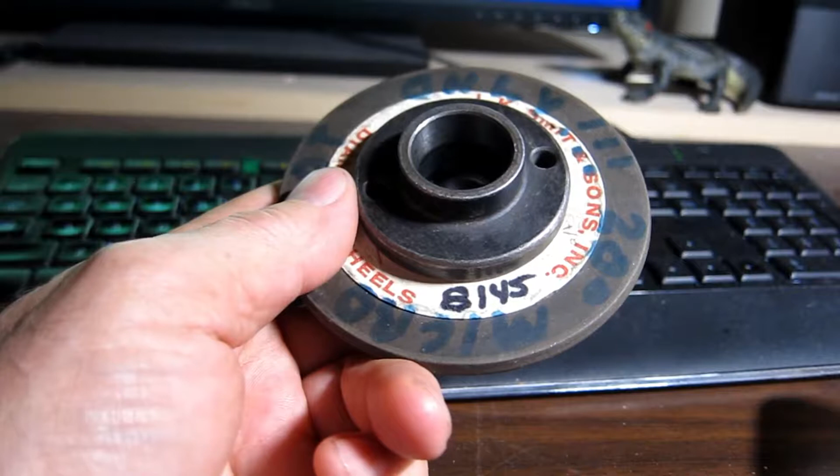Okay, this video is going to explain how to draw up placing balls in tapers to measure them when you're cutting them. It's going to be based heavily on 7.125 degrees per side, which is the grinding wheel hub taper. See that in there?

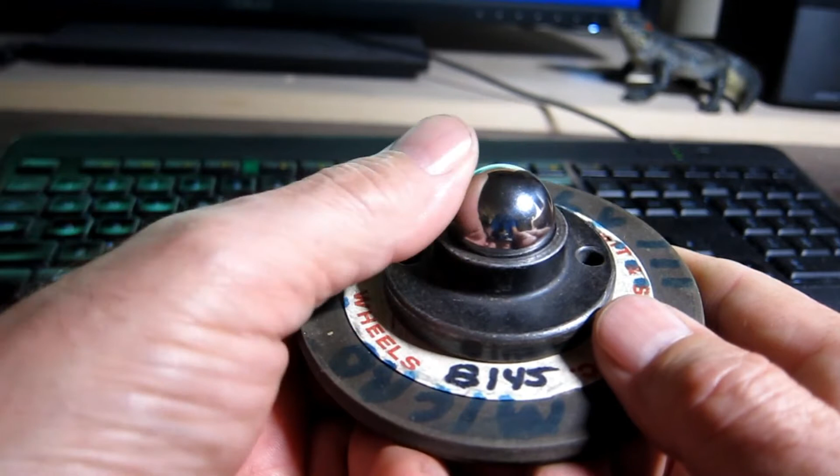Okay, now this is very common. It's for Herrig surface grinders, and it's 1 inch on the big end. That's how they're defined, by the size of the big end of the taper. And so it's 1 inch. Okay, so this is a 1 inch ball, and it goes like that. And it just so happens that tangency, it does hit just barely at the very top. And so I'll show you that. But this video is going to be based on that.

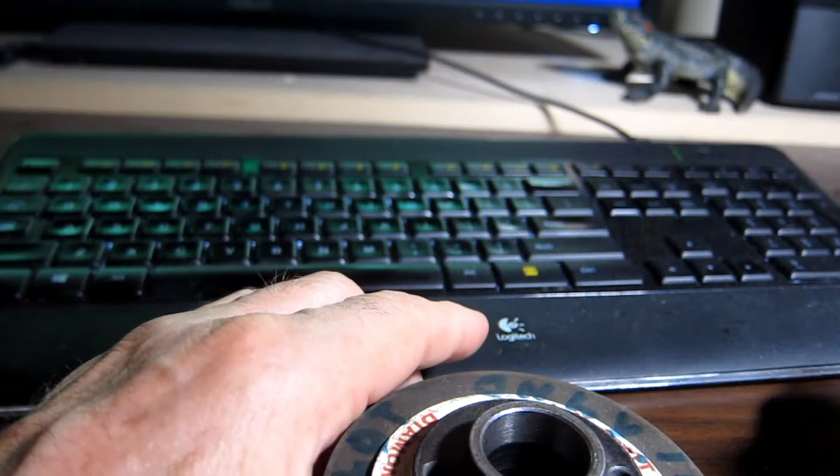It's not going to be based on teaching trigonometry from A to Z or teaching how to use CAD/CAM. Because if you have CAD/CAM, after you see how to do it, you will be able to go and do it. In the video, I can't teach every keystroke, every trigonometry angle, sine and cosine, and so forth. But anyway, there you go. So I have to stop filming, otherwise the camera won't focus on the screen.

I'll show two methods: how to place a sphere in a taper, in other words, the ball that you're going to use to check the taper while you're making it, and also how to do roll pins. How do you place the roll pin on the geometry so that then you can click and tell how to measure.

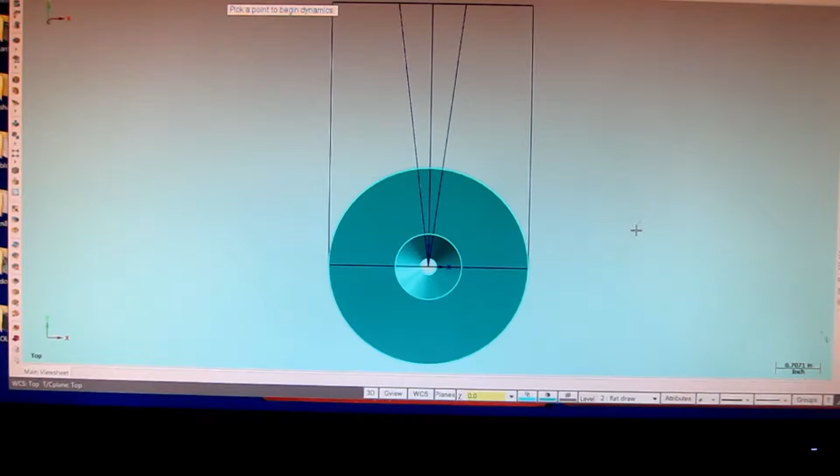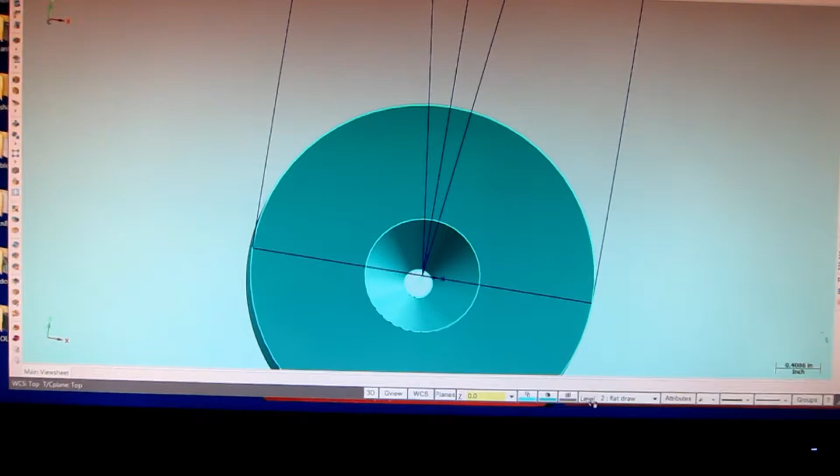Okay, so to put the sphere in a taper, here it is. See, there's the physical taper itself created in the solid, but we're not going to use that. I just wanted to show you that. See the taper? That's the 7.125 for a Harig surface grinder and most surface grinders in a shop. But we're not going to use that. What you do is you just draw it in 2D.

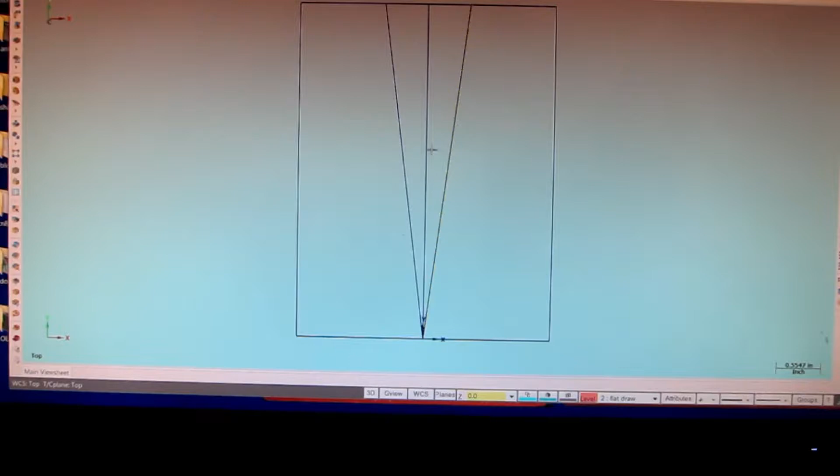Okay, like this. And here again, it assumes that, for instance, each click to produce these lines, produce a center line and then tell it to rotate it over 7.125 and then the other way 7.125 to produce this cone. It's not the scope of this video for me to explain everything like that, or it'd be hours long.

Okay, now how do you place a sphere down in there? Now the top of this is 1 inch. Up there, that's 1 inch. In other words, that hub you saw with the ball sitting on top of it, that's what this is. I did bring it down to a point, and that is the way that people do it with their drawings. You just bring the cone to a point.

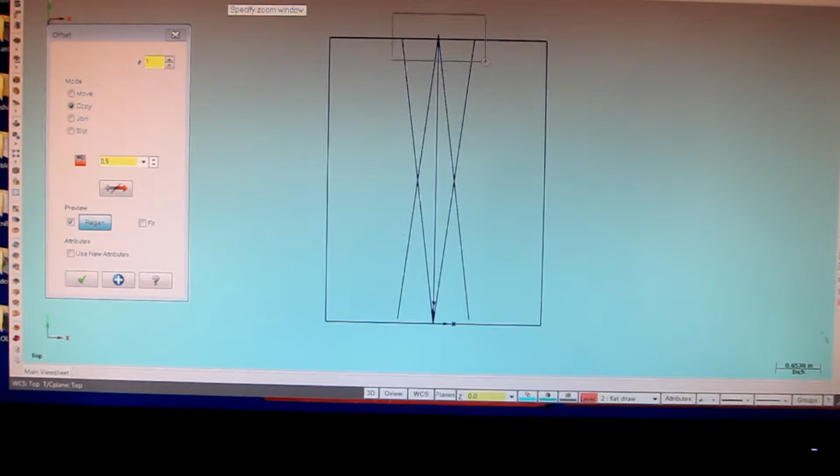Okay, so if you want to place a 1 inch ball in there, you just offset the lines by half an inch. So X-form, offset, 0.5. Okay, and you click on the lines, offset, offset. Now see where they coincide up there? Right there, right where they coincide. Okay, so I go circle, a diameter of 1 inch, and click right there at the intersection, and look at what we have there. The perfect.

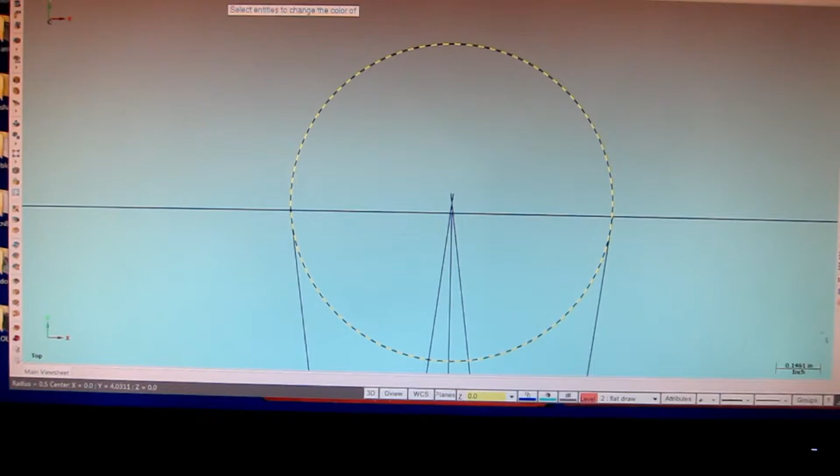Let me change the color so you can see it. Damn. Sorry about that.

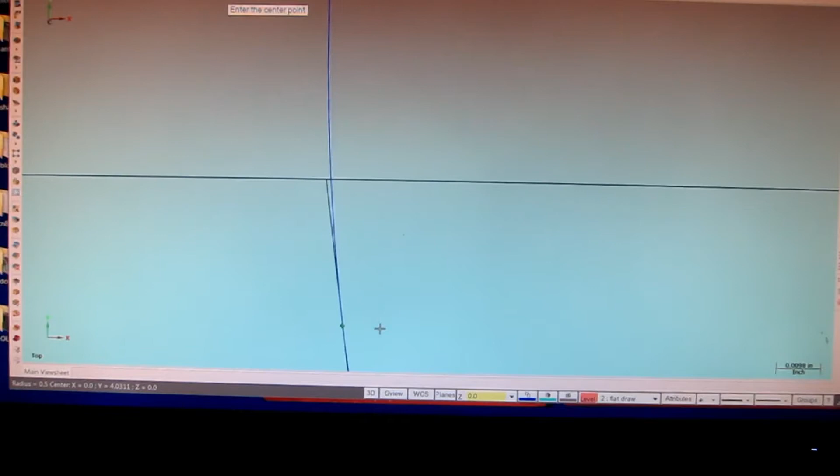Okay, so there you go. The tangency is down below. It's right on the chamfer of the hub. So it is down there. See where that little mark is? See the tangency of where it's touching? It is down in there. And so once you place the ball, now I'm going to do a 3/4 also.

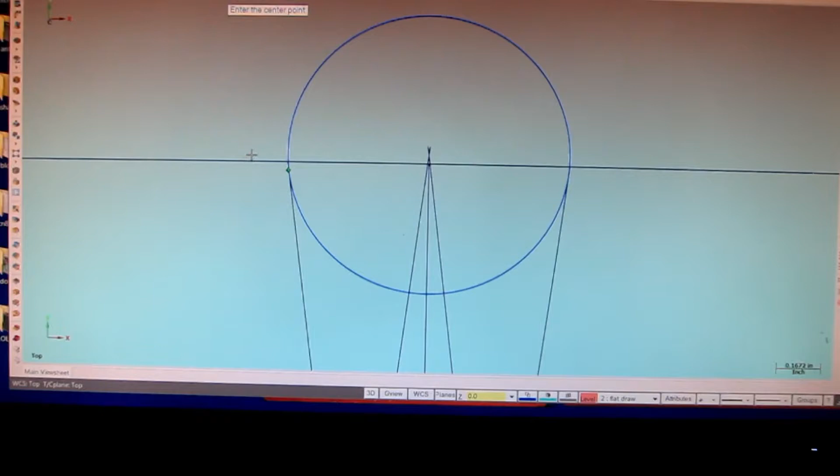Once you place the ball like that, they use common methods like what you already know to use. For instance, here's your surface right there, where you're turning the taper, and there's where you faced off. So I don't need to explain to machinists how to measure from here to the top of the ball. I assume you know how to do that.

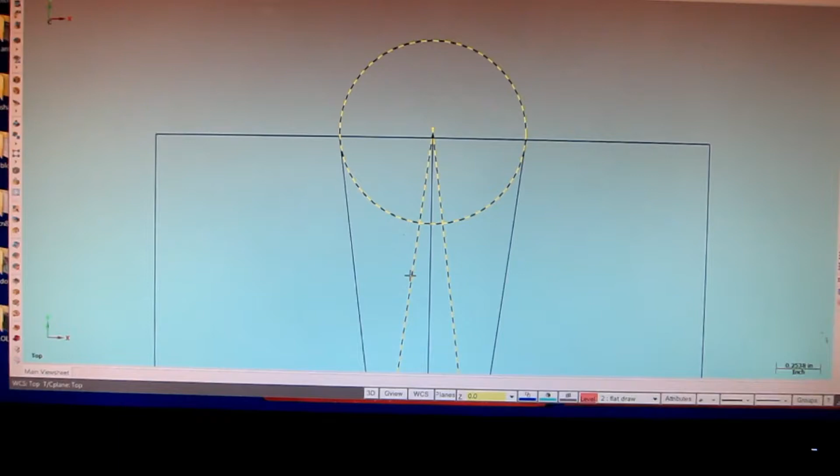Now with the 3/4, the ball's going to be down in there. And so what you'd be doing is taking a depth mic and micing down into the top of the ball. Okay, so I'm assuming that you know how to do that. So let's delete what I just did. Now I'm going to do the same thing for a 3/4 ball, which will be down in the taper.

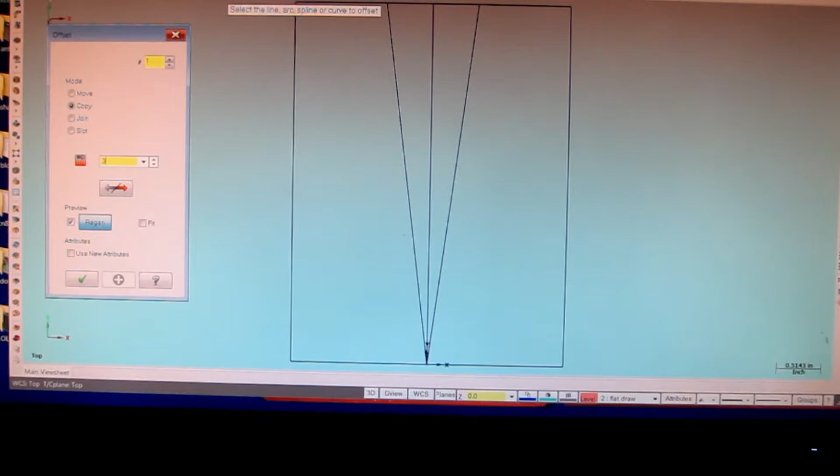Okay, create arc, circle center point, or excuse me, X-form, offset. Okay, now it's going to be a 3/4 ball, so the offset is .375. Okay, offset, offset. See where they coincide?

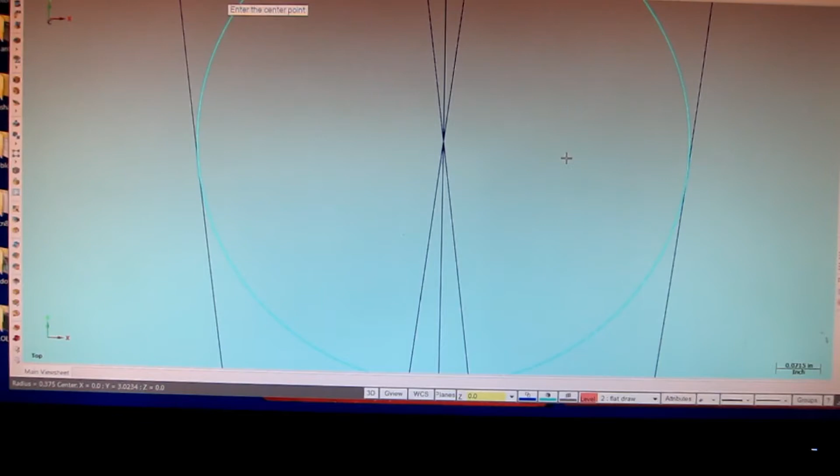Okay. Now let's create the ball. Diameter 0.750, and right there at the central point, and look at what we have there. See there? There it is, perfect. Okay, so to make your taper exactly to the tenth on the lathe or the mill, wherever you're making it, it's just the distance from the top of the ball to the top.

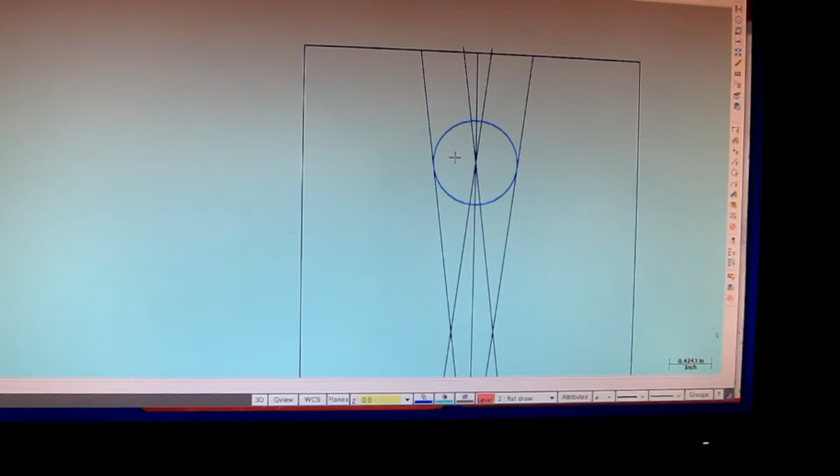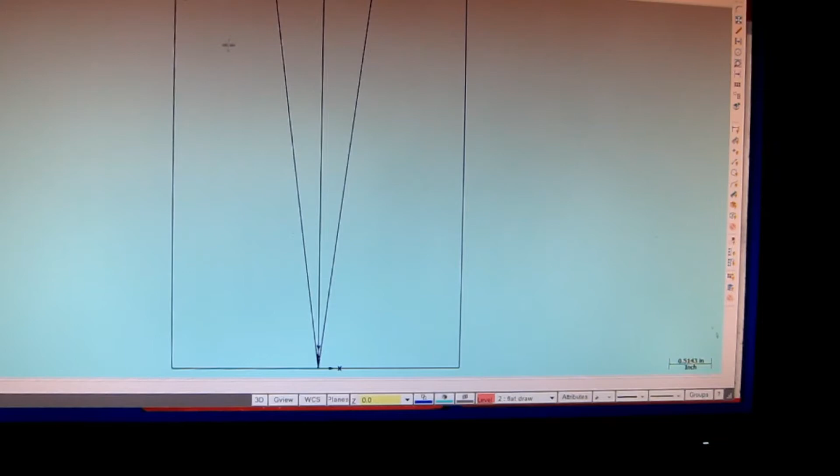Okay, now I'm going to show the create fillet method to do the same thing. Okay, so let's delete what we just did. Okay, now this is also for doing roll pins. A lot of people don't know how to do roll pins on the geometry of their CAD system. Okay, create fillet entities. Okay, so first thing I'm going to do is a 3/4 inch ball. I won't do the 1 inch, but it will produce the ball just like I showed you at the start. It will do the same thing. So let's do the 3/4.

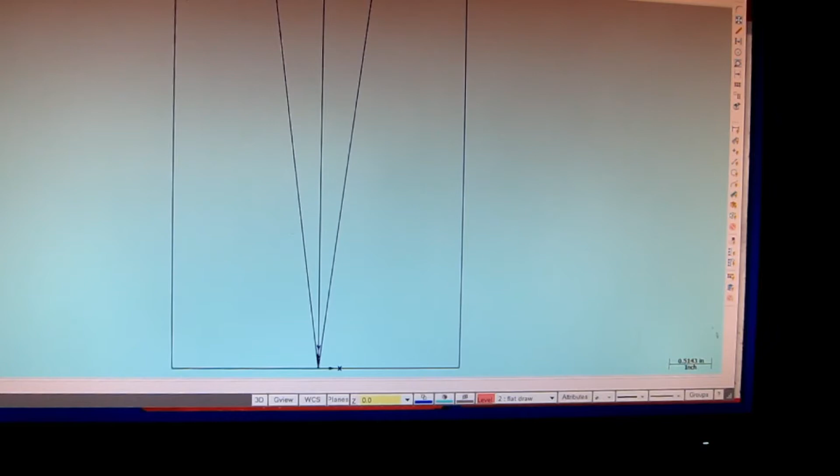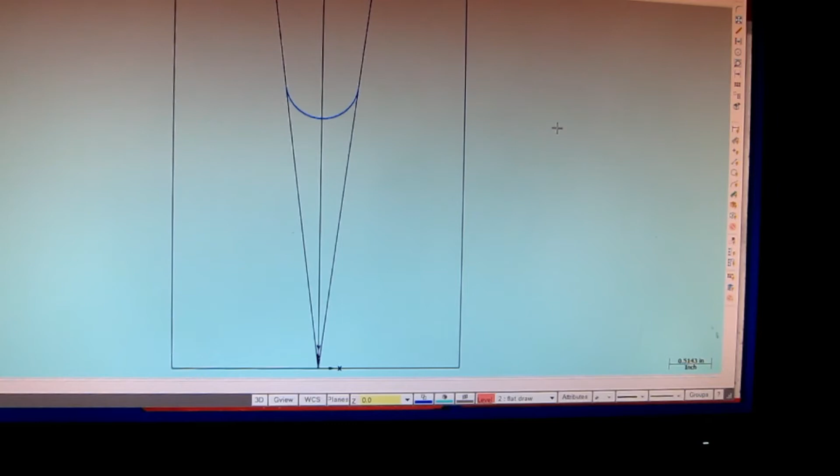Okay, so 3/4, 0.375, half of 3/4. Now let's create our fillet. Okay, create the fillet. There you go. Except I don't want it to trim it. So there. Okay, and now I want to put the ball there so you see the hole. Now that would be good enough for my numbers to depth mic or whatever, but instead let's put the ball there so that you physically have the satisfaction of seeing the ball.

Okay, now this is create fillet. So you just go edit, trim break, close arc. Click on it, enter, there's your ball. See there? And it's placed perfectly, automatically tangent with the sides of your taper. And so the distance to depth mic down there, and your taper will be right on to the millionth, as close as you can measure, is analyze distance, top of the ball to here. And that distance is 0.6017.

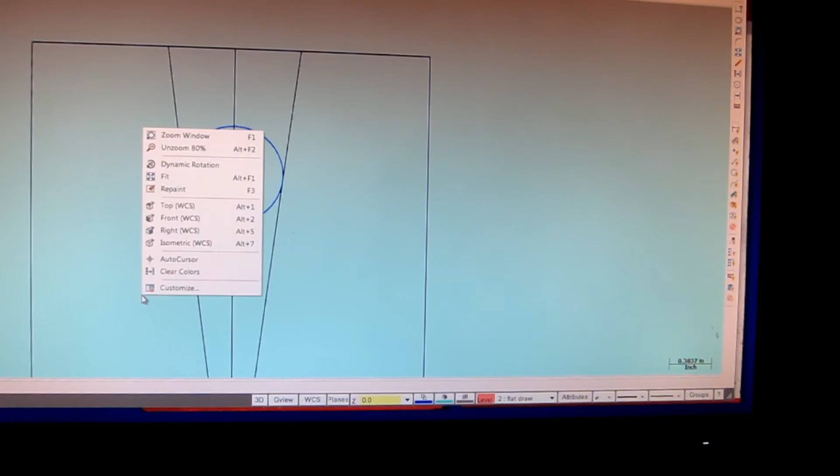So if you physically do this and take a 3/4 inch ball and put it in there, you can actually make this taper, and that 0.6017 is exactly accurate to the tenth. You will produce that exact taper. Okay, now let's do a roll pin, because this is closely related. Oops. This is how to do roll pins. You make them as a fillet. So I'm going to go down to the bottom here as if this was a pocket with angled walls. Let's say it has angled walls. Okay, they're straight up and down, but it doesn't matter.

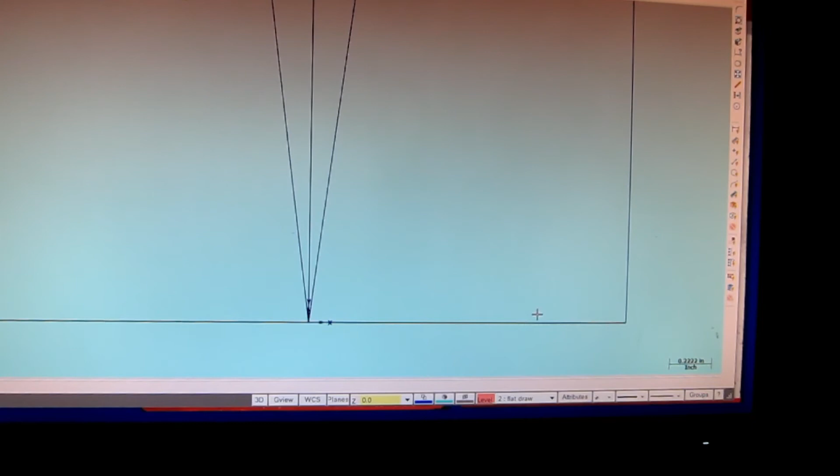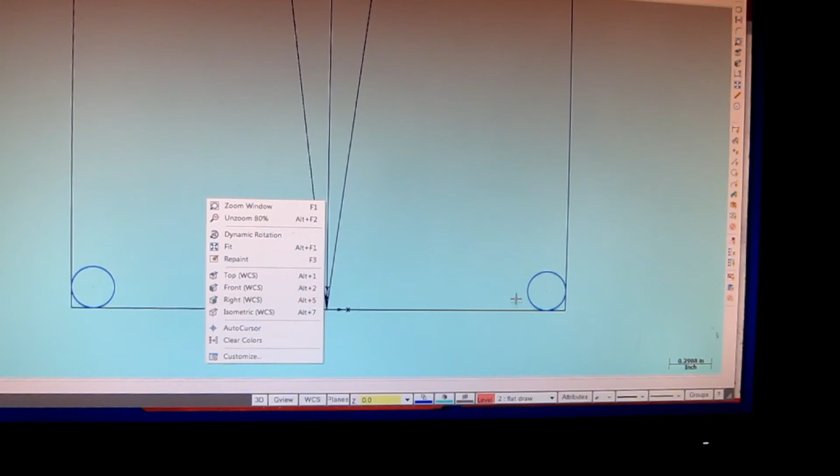And so create, fillet, entities. Okay, and it's a 1/4 inch roll pin, so I'm going to go 0.125 radius. And you just do the same thing. Click, click, click, click. Okay, and there you go. And so let's make them circles so that it will be easy to visualize instead of having to do the math. Trim break, close arc, click, click, enter. There's your roll pins.

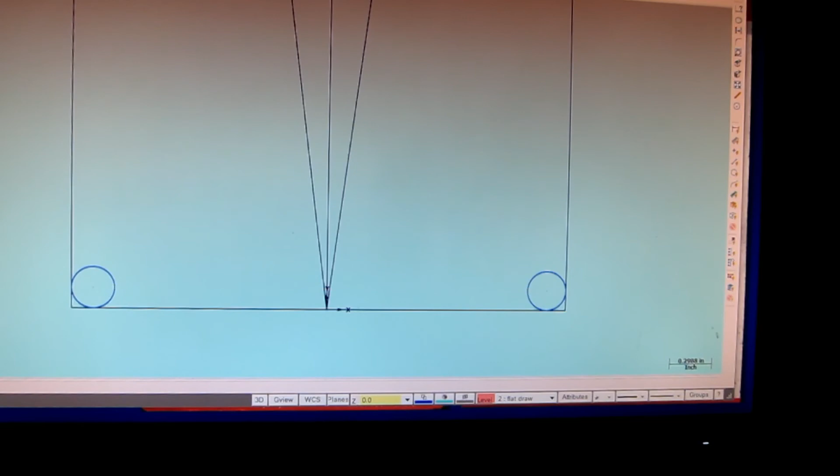And so your gauge blocks in between here to get the thing perfect, it's analyze distance from there to there. So your gauge blocks 2.5. It just so happens that it would be exactly a 2-inch and a half inch. And when your gauge blocks measure that, well, your walls are exactly there. So in other words, I've showed the basic concept, but the intent was not to teach trigonometry and machining 101 and CAD-CAM 101 from first grade on. That was not the point of this video.

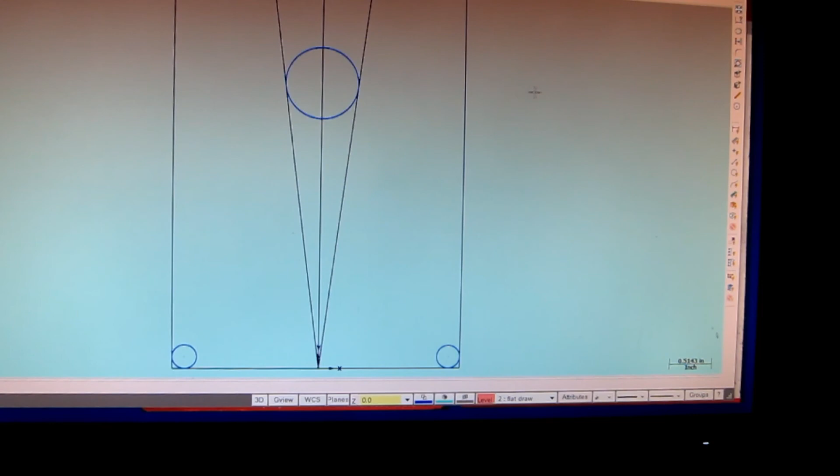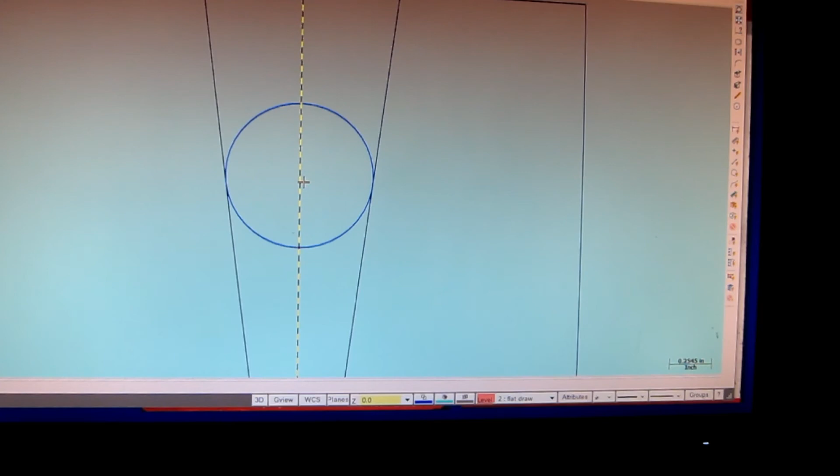But to place a ball in there, that is how you measure tapers. To place the ball in there, you have to know how to place that ball in there. Okay, and that's what I've done. That's what I've showed you. I've used two methods. So you offset. If this is 3/4, then you just simply offset half of it. Offset, offset, and snap the ball to the intersection of the lines, and there you go. Okay, that's it. So I hurried this up and I made this video half as long as the first one that rambled too much. But it's very hard to show a lot of complex stuff and do it in just a few seconds.